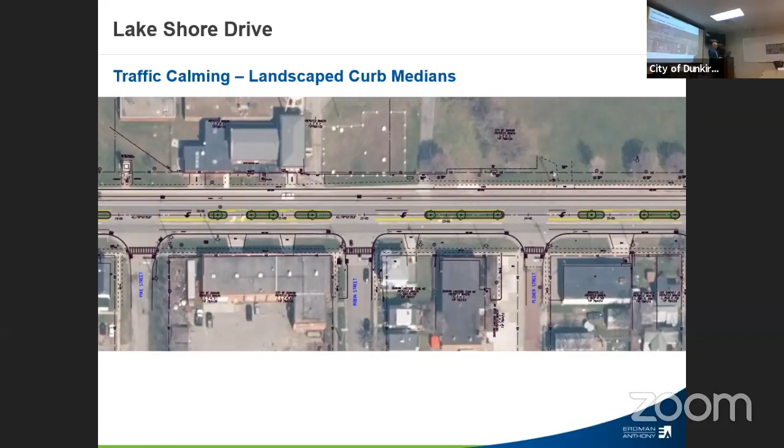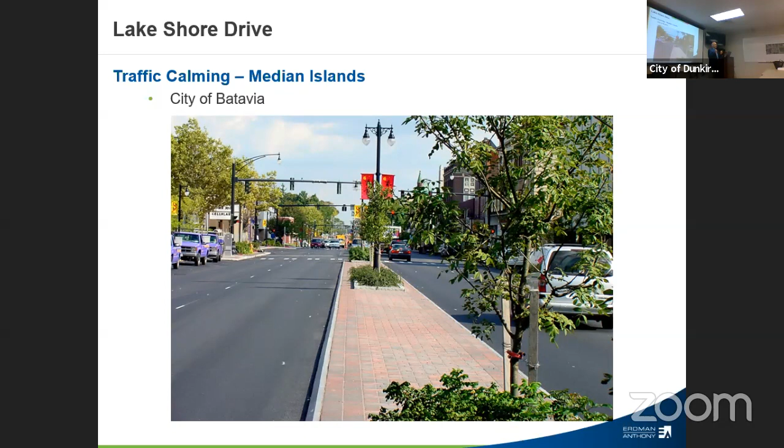This is just an example of a project that we worked on, in the city of Batavia. Before it looked similar to Lake Shore Drive, a lot of pavement. In this case there were actually 4 lanes of traffic, so it was a little bit wider. But these islands create a little bit more of a boulevard type feel, a little bit more residential, a nice commercial area, where traffic can go a little bit slower. You can see the aesthetics of the area, the pavered median, landscape trees, and other things in that median, but it really does narrow it up and makes vehicles slow down.

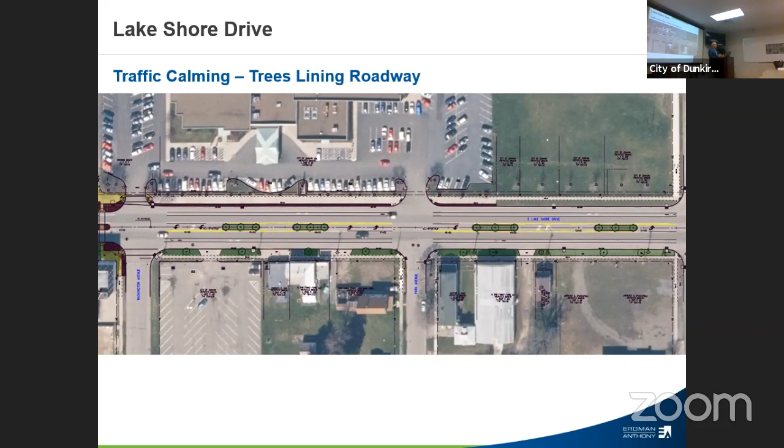So I mentioned the trees kind of lining that roadway. We're looking at a lot of different areas to add that green infrastructure, those trees along the corridor, to create a canopy along the roadway, create a little bit more of a community type feel as opposed to industrial type feel. Again, to keep it more inviting, make it a narrower corridor for vehicles and slow down traffic.

This is a project we did in the village of Perry. Same type of thing, we added landscaped islands along there. In this case, we added a gateway feature as well, an old watering trough that was in some historic photos that they were able to salvage, and they used it as a planter now. You can see there's also trees that we planted along the curb offset area, right adjacent to the curb, where that area is usually filled with either signs or mailboxes or snow storage in the winter. So we fill that area, give it an aesthetic treatment on the surface, but also to identify the walking corridor for pedestrians so that they don't have conflicts with, in this case, benches, trees, trash receptacles, that kind of thing.

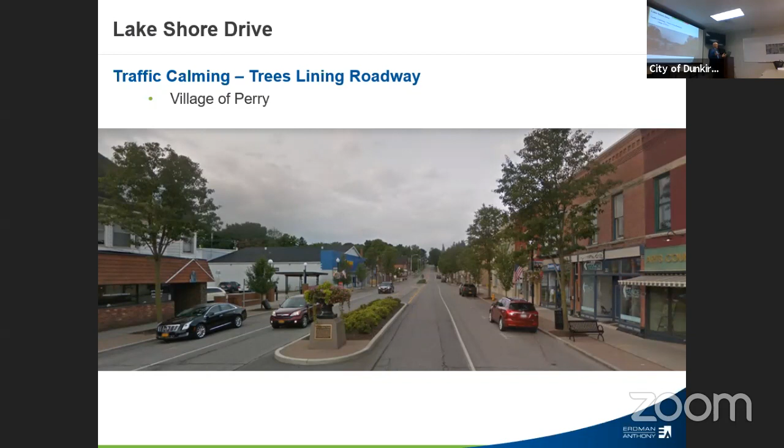Another thing that we're looking at is curb bump outs. There might be 1 or 2 along Lake Shore Drive now, but we're looking at adding them in different spots, key areas along the corridor. We've talked to the city, both Rebecca and EJ, to kind of figure out where those key points are where people are crossing the street. And there's quite a few crosswalks now, and we wouldn't look to get rid of any of those, but basically to enhance them. You can kind of see what this bump out does.

This bump out really reduces the area it takes for people to cross the road, that length. So especially older pedestrians using the corridor that maybe travel a little bit slower, it can be a tough move if it's a really wide pavement section to go from curb to curb. So what these curb bump outs can do is reduce that space. The other thing they can do is keep any vehicles that are parked there offset, so they can't get any closer. So it provides a lot more visibility for people that want to cross the street, so they don't have to sneak between cars. There's a nice area they can view what's coming.

The other thing, we can use these islands - we propose a flush area in those islands as a refuge. If you get caught in the middle and there's a car coming, you have a space that you're safe in, in between that traffic, to stop and then make the rest of the way across the roadway. So those are proposed. In this specific example on Swan Street, where there's a crosswalk on the east side of the road, we moved it to the west side of the road so we can utilize that bump out that's proposed.

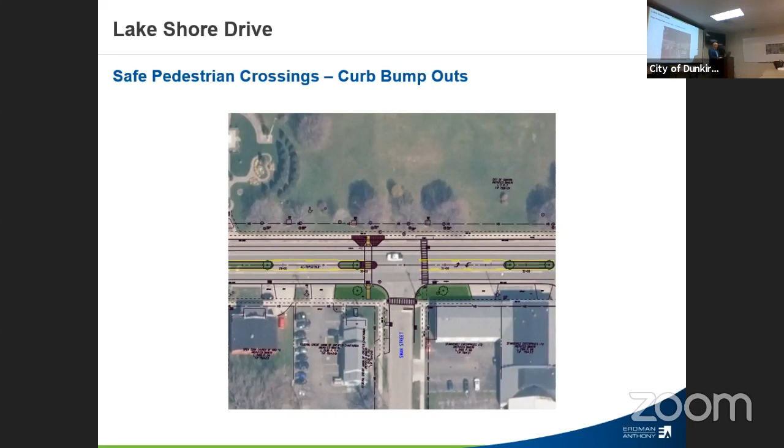Another thing is to make it safe for bicyclists using the corridor. We know there's already bike lanes from Central Avenue to Main Street, but we'll continue those to the west. This basically takes some of that pavement that's pretty wide now, used for parking and travel lanes. The plan is not to reduce any of the parking along the corridor, which is good for when activity happens along the lake shore.

But also to use that space to make a safe, designated space for bicyclists. So there's a vehicle space, and we have a median which would have landscape islands in some areas, left turn lanes in others. Next to it would be a travel lane for vehicles, next to that a bicycle lane, and next to that a parking lane in areas where there is parking.

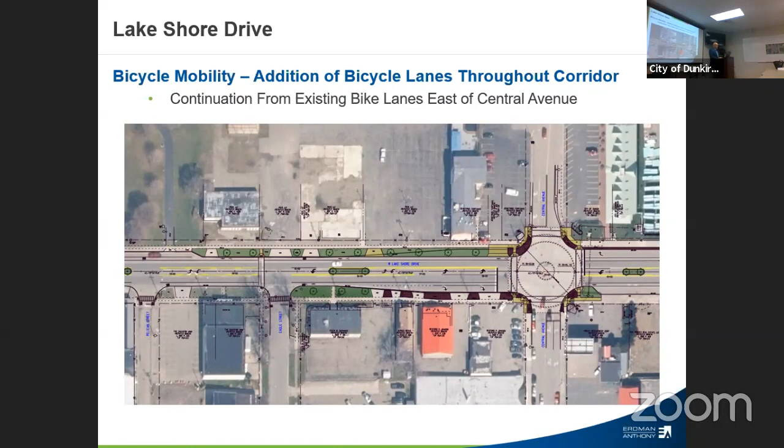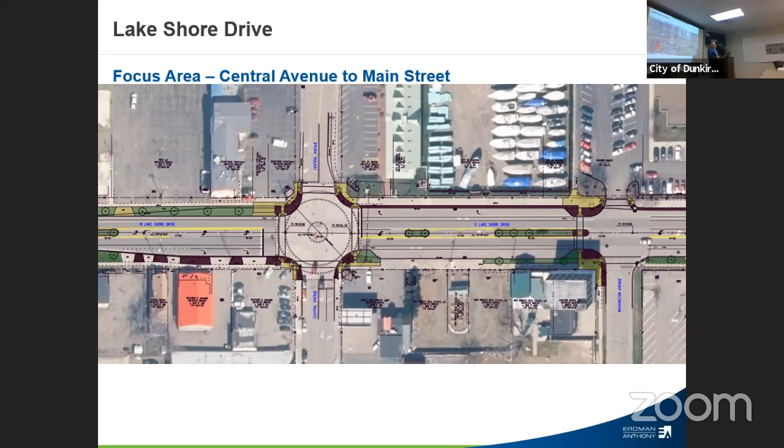One of the focus areas we were going to look at was between Central Ave and Main Street. That's an area that has a lot of concrete sidewalk, so we'd look to break that up, add some bump outs where we can, designate those parking areas, add landscaping, trees, vegetation, and accent paving and pavers adjacent to the curb to increase aesthetics, increase safety for pedestrians, and improve the whole experience for people using the corridor.

They show just a concept, and that's important to note with all this, that we're basically in the concept stage. We're in our preliminary design, and any decisions—that's why we're having this meeting with you now—is to get feedback and take that forward. What you see now isn't set in stone. It's not going out to the contractor right away to build. We're looking for ideas, any thoughts you might have, and we'll take that back and redo our design to make sure it meets everybody's needs.

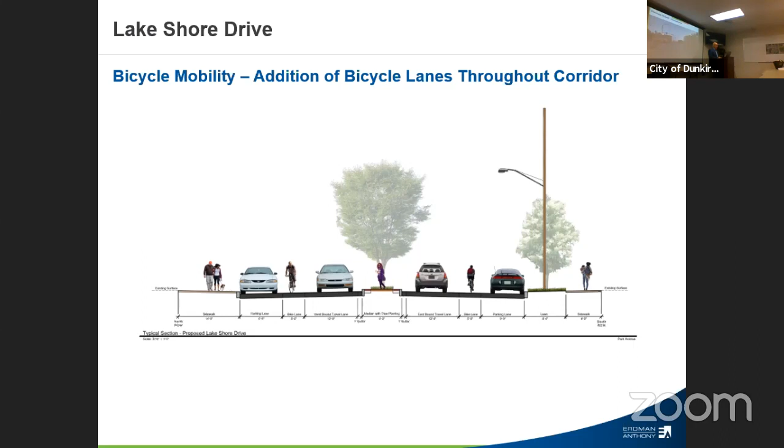EDR did some visuals for us to show the same thing of what could happen along our corridor, along Lake Shore—this is, I believe, at Central Avenue. The same type of thing, where we bring in that curb line a little bit. We still have travel lanes in each direction, a bicycle lane, and in this case a left turn lane and a traveling through lane. You can see some of the brick pavers we'd use to accent the sidewalk, along with grass and trees, to see what that does.

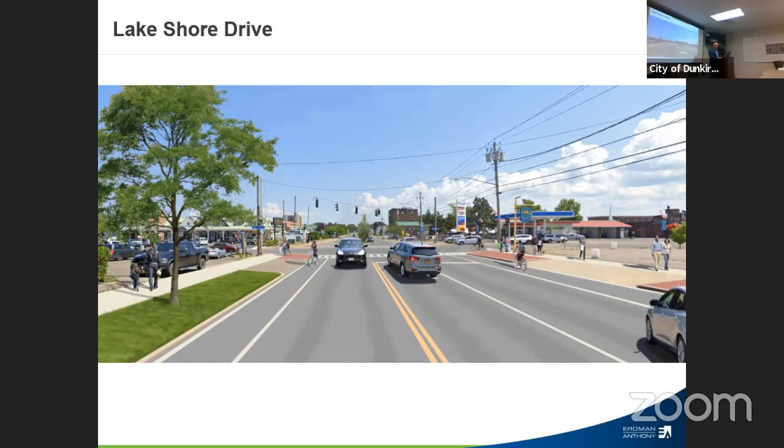And just another example, to show what an island might do. Not that we would do it at this location since it has a left turn lane, but I wanted you to get the feel of what that island might provide and how it narrows up that section. You can see the really big difference from having all this asphalt and concrete to adding vegetation, bump outs, those kinds of things, to slow down vehicles and make it safer for pedestrians and bicyclists to use the corridor.

We really want to invite people to all the areas of interest, so we want to make connections to all the businesses, the park, the waterfront, the new pier along that project. We'd want to incorporate some of the schemes used there and coordinate them into our project, so everything is continuous. We invite people to go to these locations, but we really want to make it a consistent look and feel.

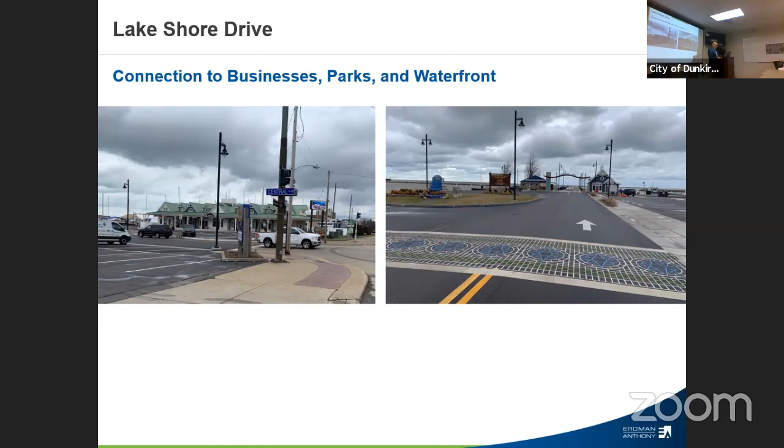Some of the things we focus on are the infrastructure - things that can't be added later. So the big things we focus on are median islands and bump outs, that kind of thing. But as money allows, and there is a good amount of money in the project, we're looking at cost estimates as we go through the design. So if there's extra money available, we'd like to add corridor enhancements that can create this sense of identity.

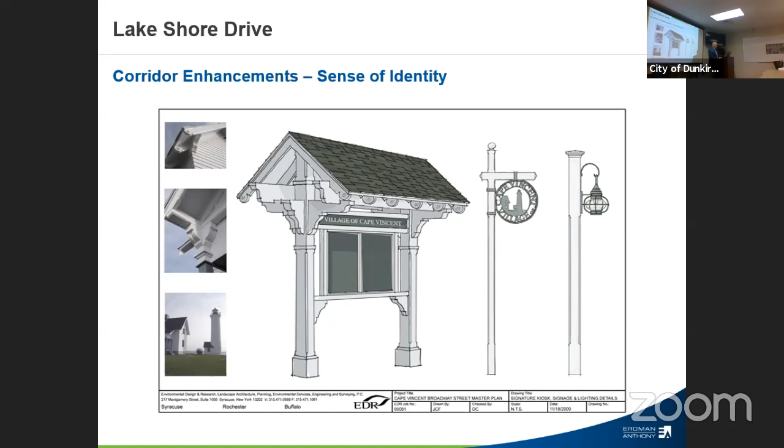Different things like signs, interpretive signing, wayfinding - those kind of features. These are some things we've included on other projects that are simple and not too expensive. So where we can add them - benches, a place to sit, trash receptacles to keep it clean, bike racks so someone can rest their bike and lock it up, same thing with a bulletin board. These things can be added for relatively low cost, but as funds allow in the project, we definitely want to include those features.

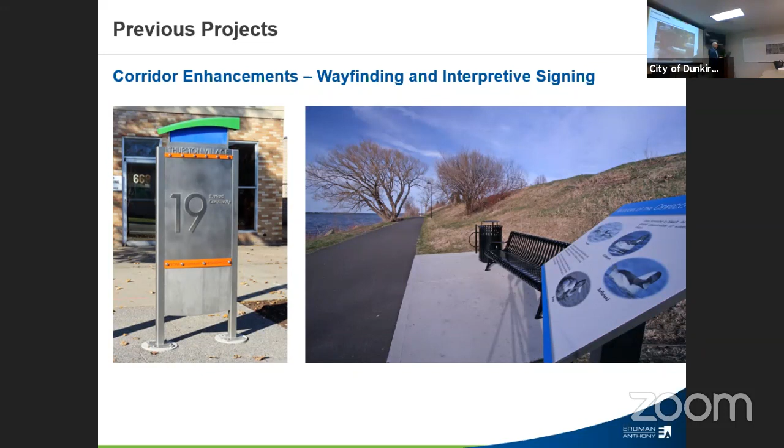This is another example, one we did in the city of Rochester, where it kind of creates that village feel. This was a gateway feature at the beginning of the project. There's an opportunity here on the east and west end to create something maybe in the median, maybe along the edge, so that as people come into this corridor, it signals that you're coming into an area of interest.

Some other things we've done - EDR worked in the village of Webster to create a gazebo, again more of a gateway type feature. Same thing I mentioned before about the village of Palmyra, with that watering trough and a big granite piece. So you can incorporate different features from the area, different things we want to identify, and add them to gateway features, wayfinding, or interpretive signing along the corridor to make it your own.

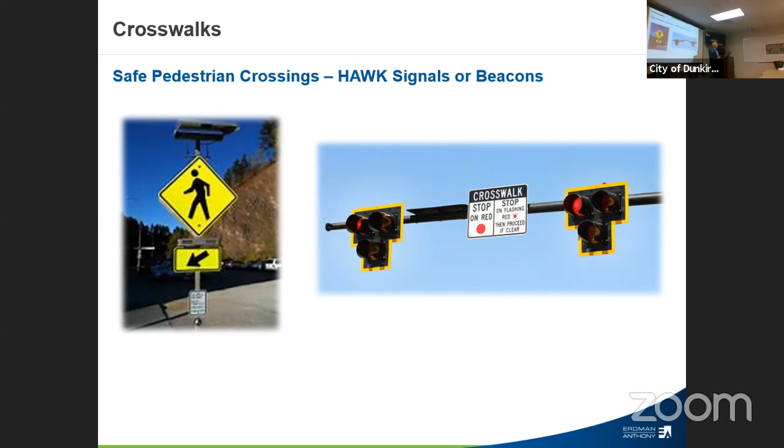Other things we'll look at, again as money allows, is making sure it's safe. We know some of these crosswalks get very busy when there are concerts and other events at the lake, so safe pedestrian crossings matter. One option is dynamic signs - when you push a button, a strobe light goes on, identifying to vehicles that someone could be crossing the street. Up to the extreme example where there's actually a signal for pedestrians, which can be turned off and on during big events so we can control that. Those are different things we might look at to make sure it's safe for everyone using the corridor.

As far as the timeline and where we are in the project, we're in the preliminary stages, so we're open to any comments. I mentioned the formality we have with federal money and the New York State DOT as the watchdog for that money. There's an environmental process we go through - EDR is actually doing that for us as well, and we're doing a screening to make sure what we're proposing isn't going to have any negative environmental impacts. They're going through that now, working with the DOT to get that approval process.

So we're doing what's called a design report, and when that's approved, that signals the end of our preliminary design, and then we move into final design. When we're done with preliminary design, that's when we have a project concept to go forward with and start creating plans that we can have a contractor bid on.

We anticipate getting the design approval maybe in a couple of months, definitely by the end of the year. Then we'd go into final design, and bid the project sometime in springtime - early spring or late winter is what we're thinking - so the contractor can get going when the weather gets nice.

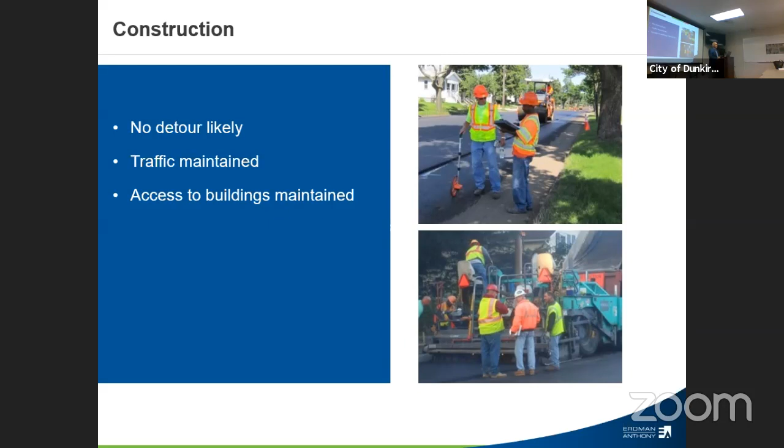That's all I have as far as the presentation, so I'll open it up to questions.

No matter what the final design is, is it likely that all of the existing sidewalks will be torn up and redone on both sides between Lake Shore Drive? Would you be keeping any of the existing sidewalks, or some of them? Yeah, because of the funding - with all these projects we have limited funding, so we're going to do an analysis of all the existing sidewalks, probably next week or the week after, to see what's serviceable, what can be saved, and what has to be replaced.

Okay, so if you can put it this way, if we were to have to do all the sidewalks along, it takes a lot of that aesthetic stuff out of it, because we just can't afford to do everything. Right, as much as we'd like to, and I'm sure the city would also. But that goes into my second concern.

Sure, I think one of the biggest barriers to aesthetic improvements in that area are the overhead power lines and utility poles and things - they're ugly. And it's going to be difficult to find places where there's enough room for trees to be planted because of the overhead power lines. So I'm assuming you'll be addressing that, or taking into account how you can space out trees attractively in that area with the overhead power lines.